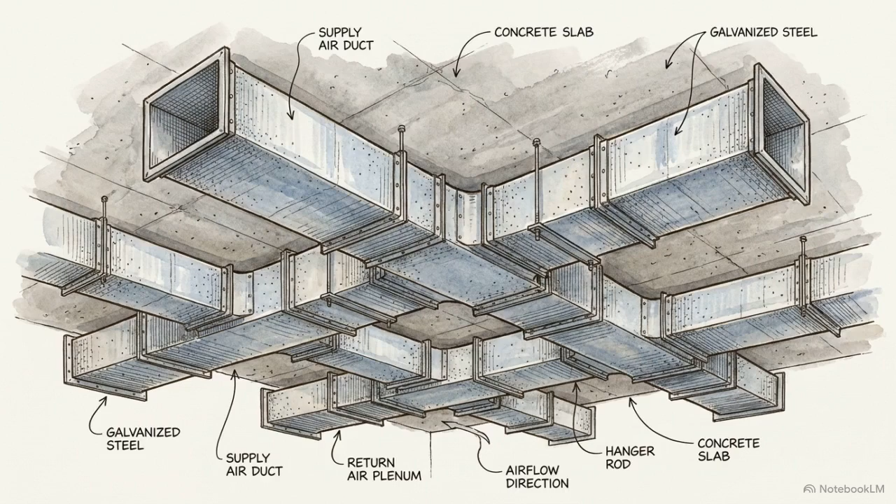Picture this. You are working on a building renovation. You are laying out a new air conditioning duct, but there is a red pipe running right across the ceiling where your duct needs to go. It looks like a quick fix. You ask the contractor to move that red pipe 6 inches to the left.

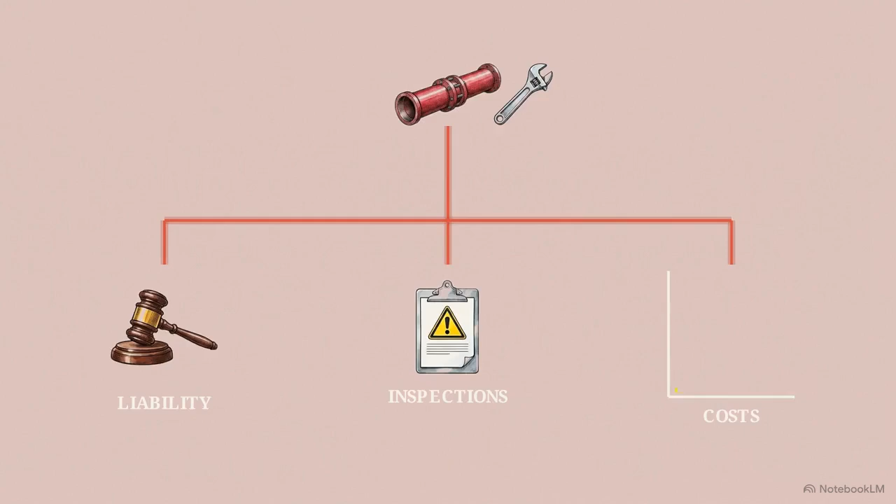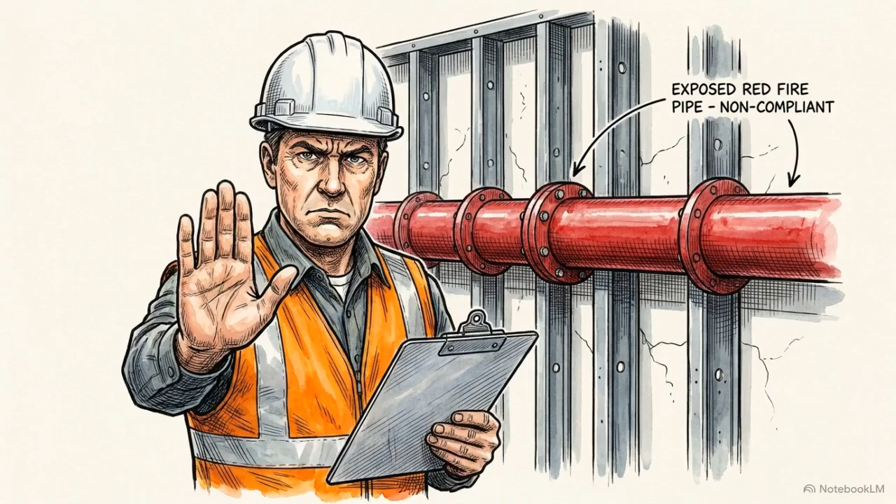Touching that pipe triggers a massive chain reaction of legal liability, rigorous safety inspections, and skyrocketing costs. The trap is assuming every red pipe is standard plumbing. In reality, that red paint marks it as part of the building's fire protection system. Knowing exactly which kind of fire system you are dealing with is the absolute first step before anyone picks up a wrench. Treating all of these lines as interchangeable plumbing is a guaranteed way to fail your city inspections. And if you are taking your architecture licensing exams, confusing them will cost you points there too.

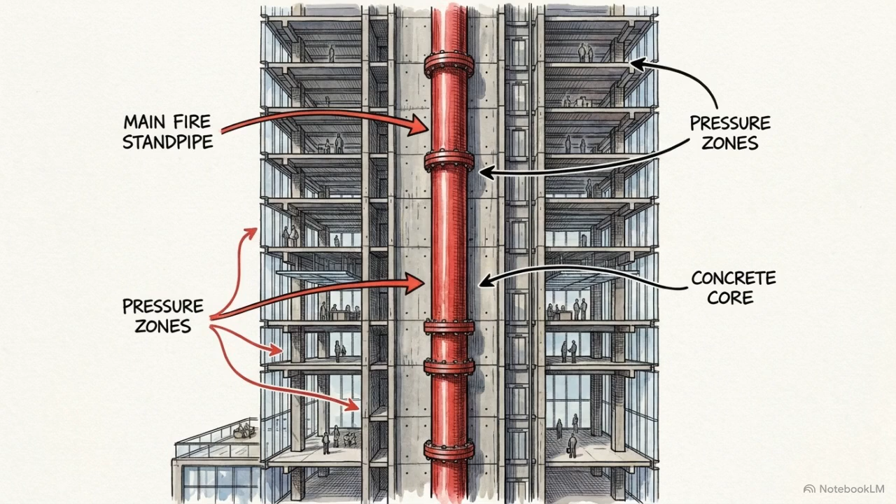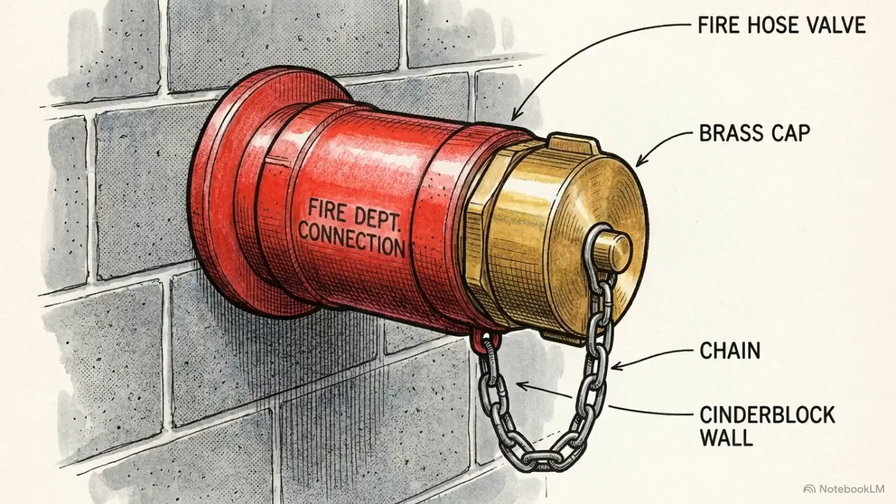Let's look at the first system, the standpipe. This is essentially a massive, high-pressure water backbone built into the building specifically for the fire department. You will usually find these connections inside stairwells. This setup allows firefighters to walk up the stairs and plug their hoses directly into the wall on the floor where they need it, saving them from dragging heavy, water-filled hoses all the way up from the street.

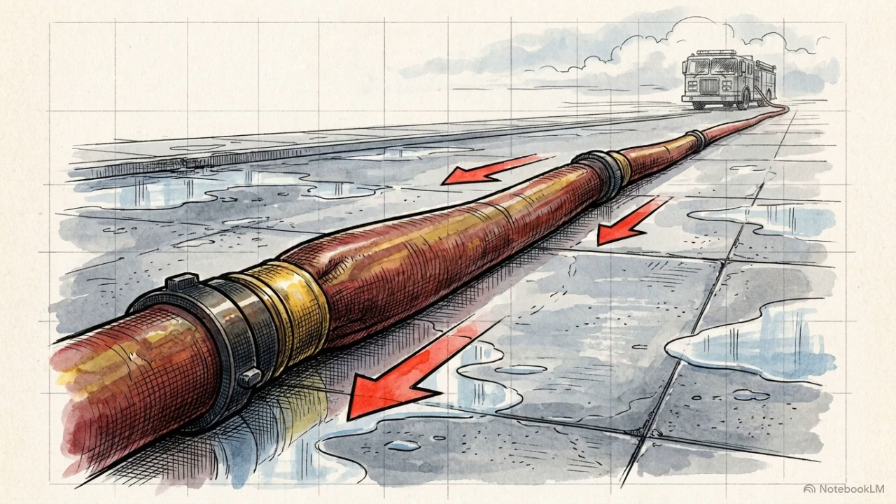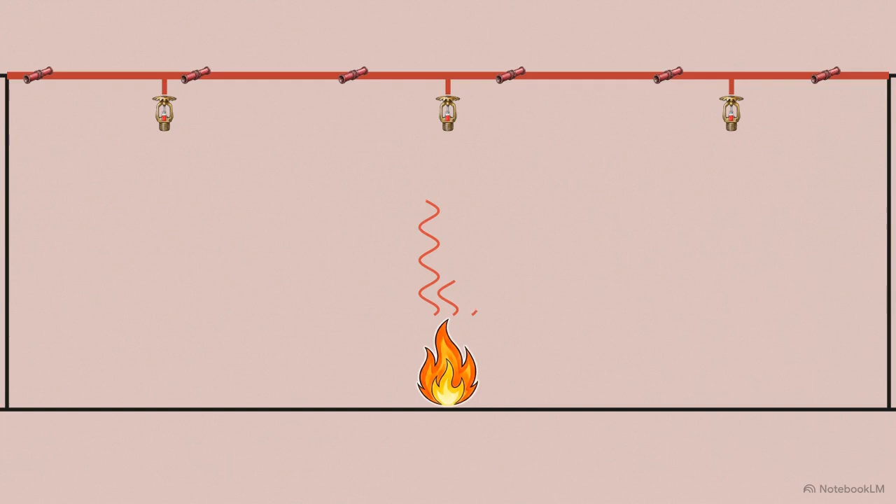This diagram shows the second system, the sprinkler. Unlike the manual standpipe, this is an automatic grid spread across the ceiling. When a fire starts, the heat rises and breaks a glass bulb on a single sprinkler head, releasing water directly over the flames. The standpipe is a waiting tool that requires a human to operate it, while the sprinkler is an active sentry that defends the space on its own.

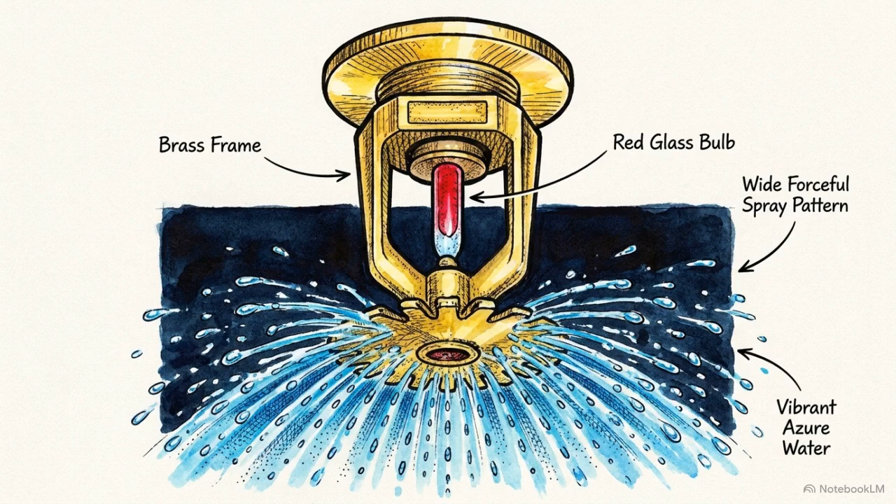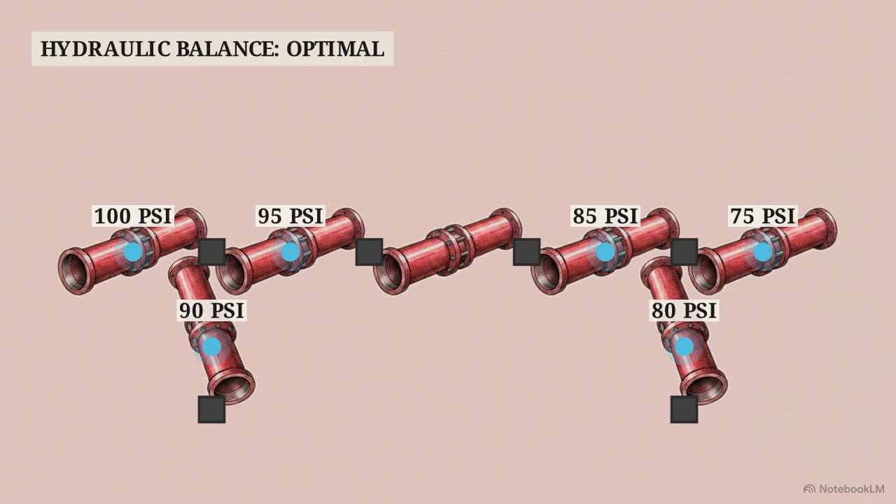Confusing a localized automatic sprinkler line with a high-pressure firefighter standpipe breaks the core life safety strategy of the entire building. Look at this sprinkler network diagram. Every inch is mathematically balanced by a hydraulic calculation, ensuring exact water pressure. Watch what happens when we bend that pipe for an air duct. Extra length creates friction, causing pressure to drop into the danger zone.

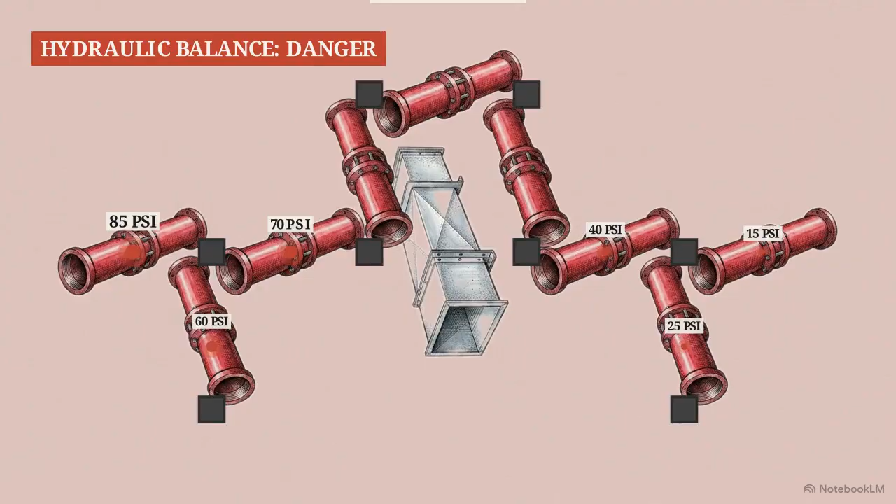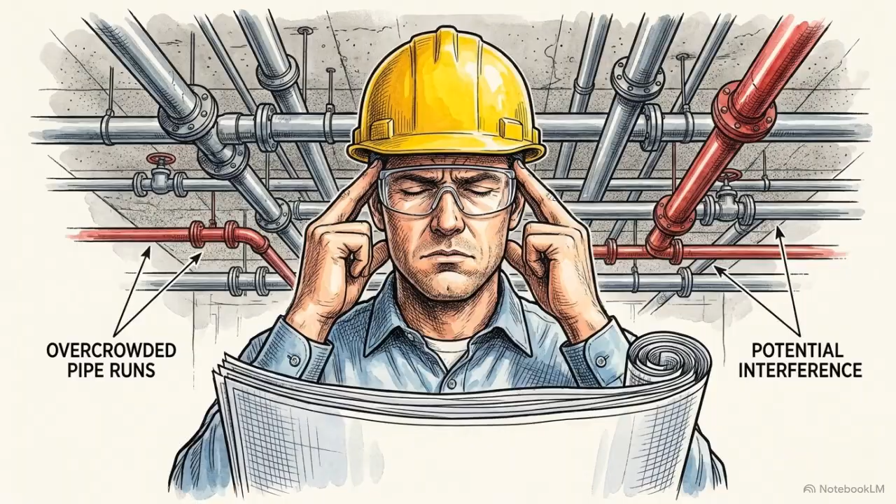That pressure drop leads right into our second problem, the building's official hazard classification. Say you are converting a quiet office space into a crowded gym or a theater. A theater has a higher risk of fire, which means the law requires a much heavier output of water to keep people safe. You cannot stretch the old office pipes to fit the new theater. Moving a line forces a total recalculation, often requiring you to rip out the ceiling to install larger pipes and bigger water pumps to meet the new code.

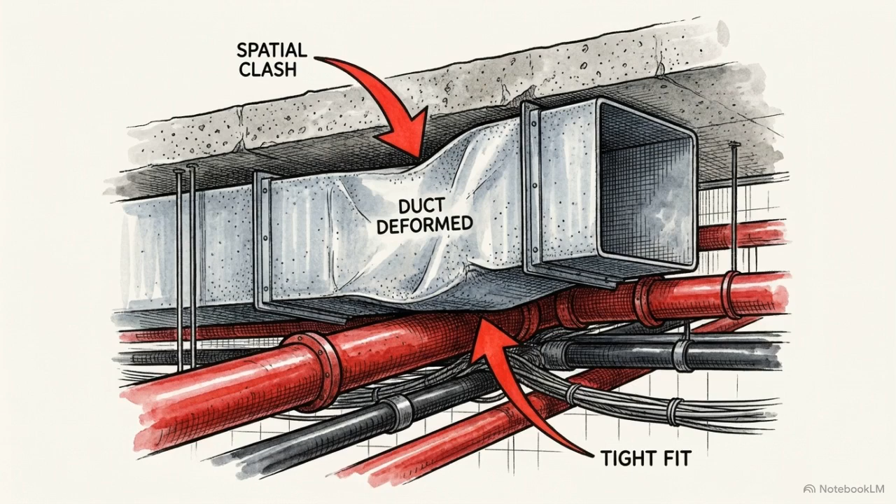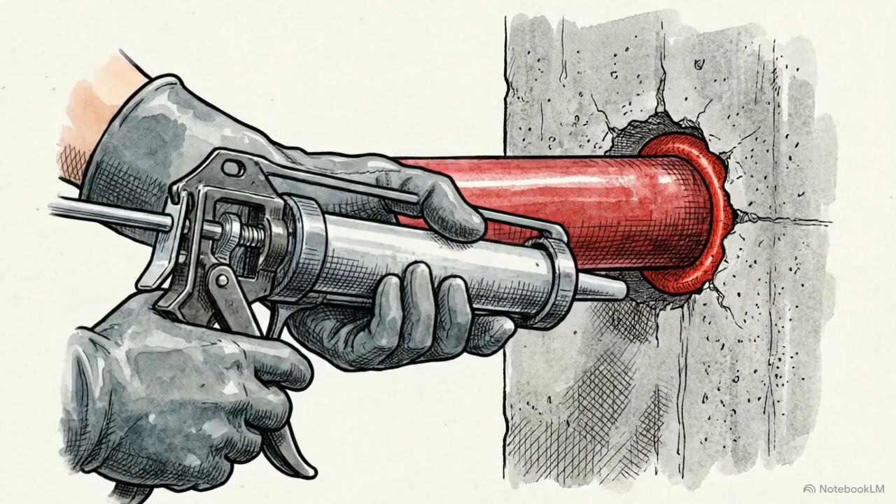All those larger pipes have to go somewhere, leading to our third issue, fighting for space in a cramped ceiling. When you try to weave a thick, rigid pipe around a new air duct, you quickly run out of room. You might hit a steel beam, or you might be forced to punch a new hole through a wall that was designed to block fires from spreading. Every time a pipe punctures one of those fire-rated walls, you have to use specialized sealants to perfectly close the gap, adding another mandatory inspection to your timeline.

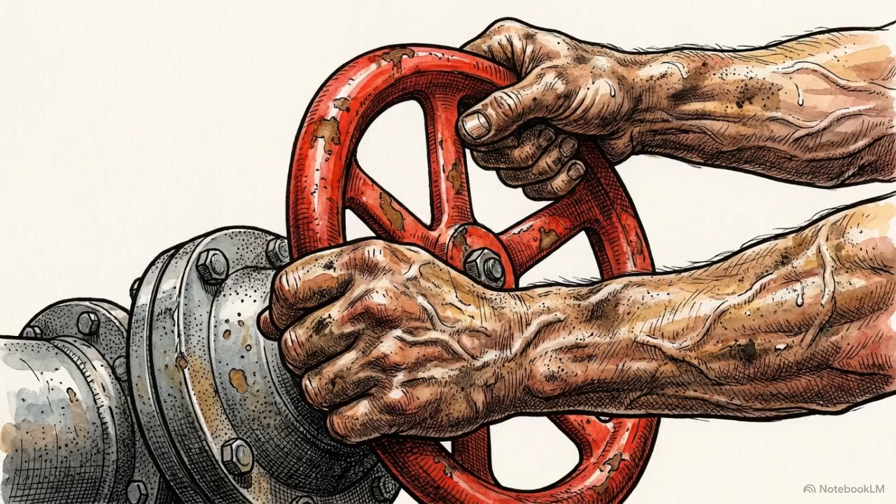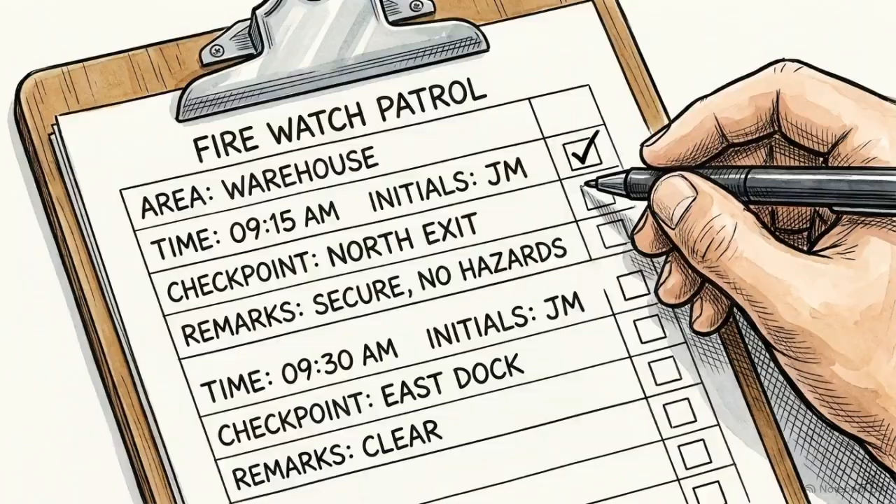The final risk happens before you even cut the pipe. You have to turn the water off. If people are still using other parts of the building, draining the fire system leaves them completely defenseless. The law requires you to hire dedicated security personnel to walk the halls 24 hours a day, on a fire watch until the water is turned back on. Relocating a fire pipe requires breaking walls, recalculating the building's entire water supply, and compromising the daily safety of the occupants.

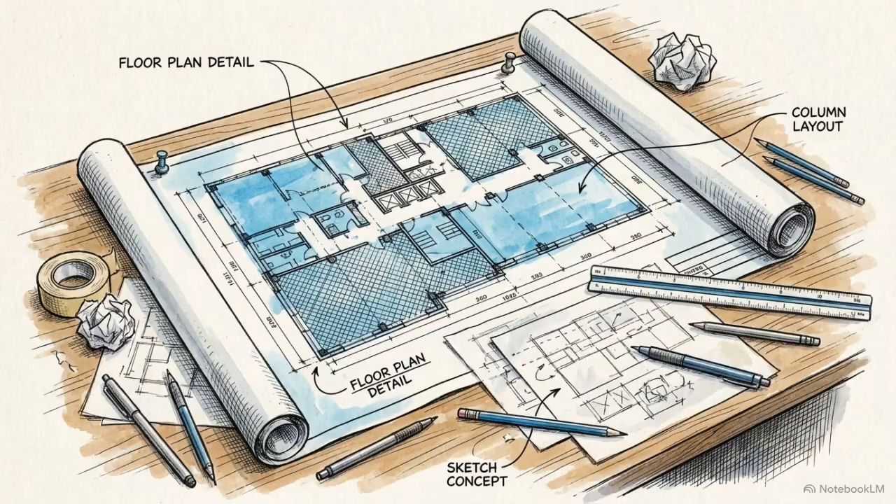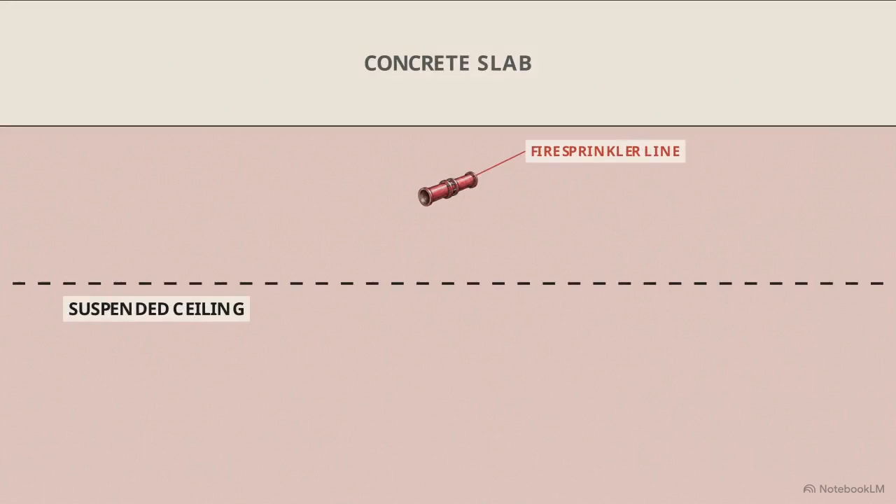If you are taking the architecture licensing exams, you will see this exact duct versus pipe conflict pop up as a test of how you handle risk. On the Project Planning and Design exam, or PPD, you are tested on the early stages of a project. The questions focus on your overall strategy and alternative routing. The correct strategy here is almost always to leave the fire pipe alone. You earn points by choosing to reroute your new air conditioning duct or by lowering the ceiling slightly, so you completely avoid touching the life safety system.

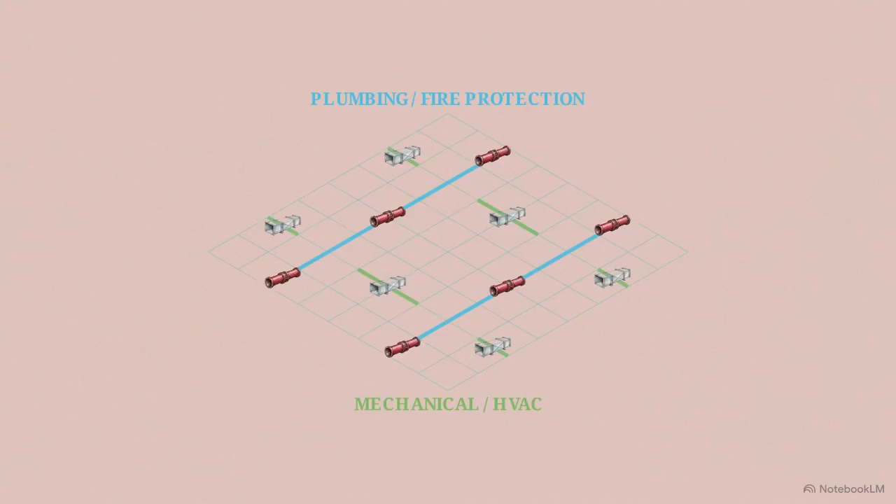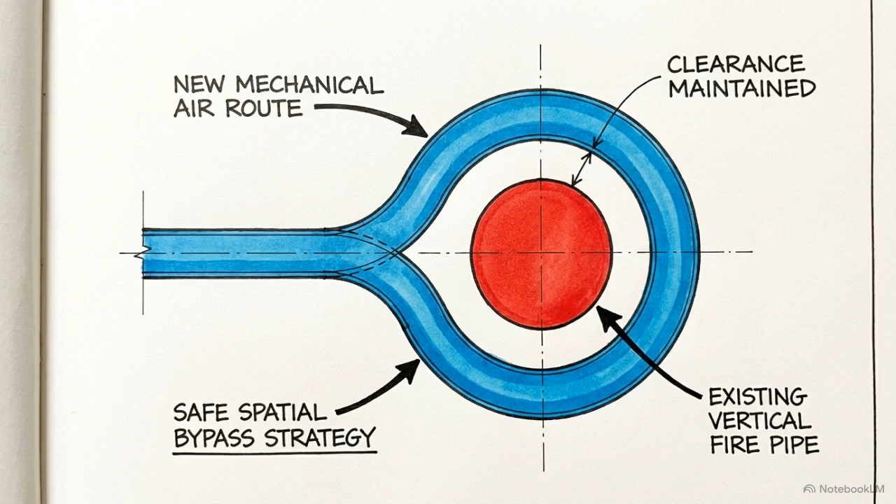The Project Development and Documentation exam, or PDD, takes a different angle. It tests your ability to properly draw the changes when moving the pipe is absolutely unavoidable. Here, you have to show how the plumbing and mechanical drawings line up to avoid collisions. You must explicitly detail the sealants used when that pipe cuts through a fire-rated wall. The PPD exam asks you to make the smartest design choice to avoid risk altogether. The PDD exam asks how you properly detail and document the risk you are forced to take.

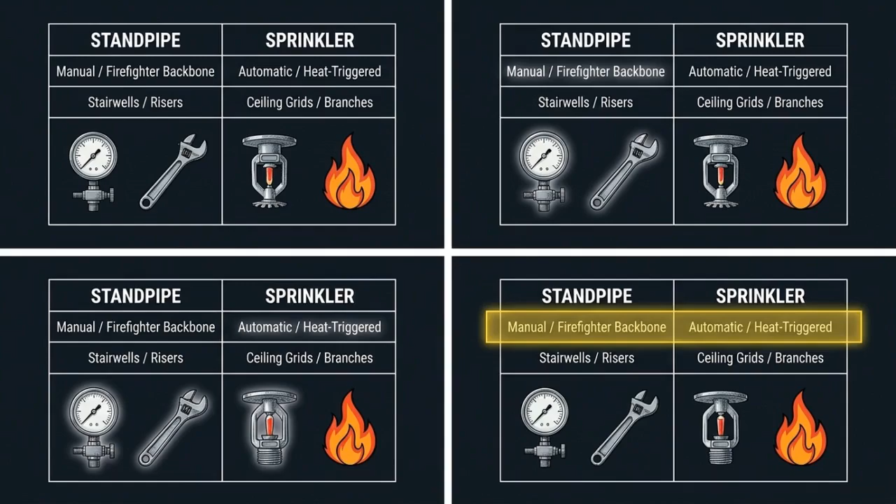Grasping this prevents massive project delays, saves your budget, and keeps a building's occupants protected. It also happens to be exactly what you need to know to pass your licensing exams. When you open up a ceiling during a renovation, an existing fire protection pipe is the absolute last thing you should try to move.